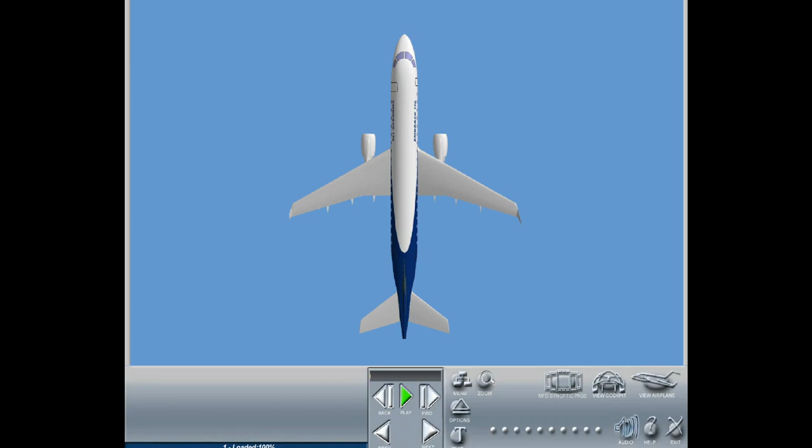The fire overheat protection system provides fire or smoke indication in the cockpit and cabin, and enables the crew to extinguish the fire.

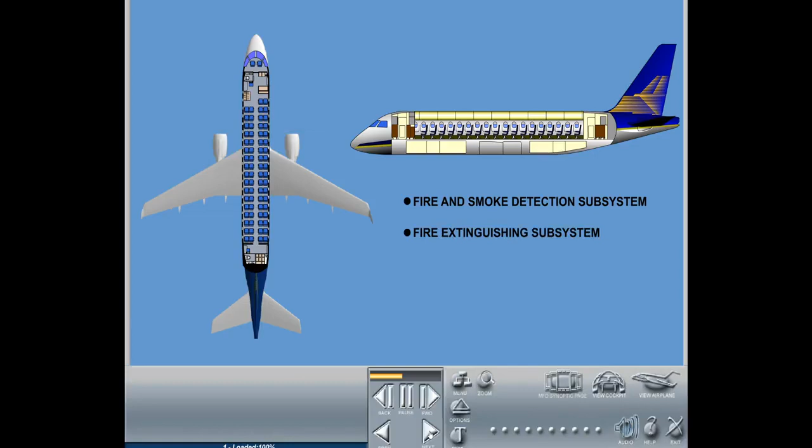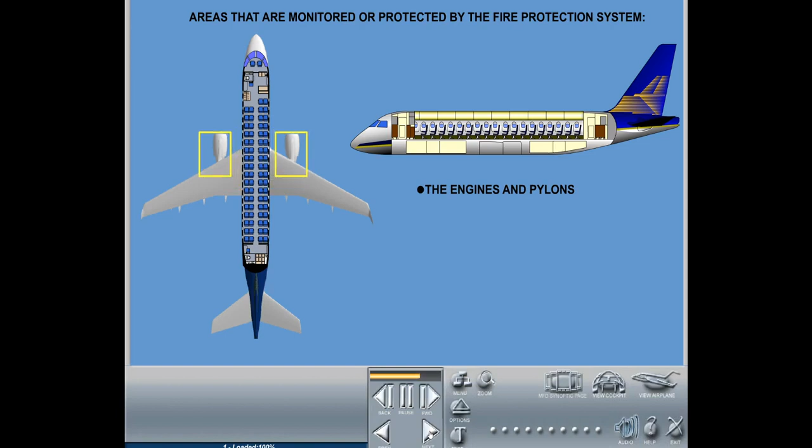The system is made up of the fire and smoke detection subsystem and the fire extinguishing subsystem. Areas of the Embraer monitored or protected by the fire protection system include the engines and pylons, the APU, the 2 cargo compartments, the lavatories and lavatory waste bins. In addition, portable fire extinguishers are located in the cockpit and cabin.

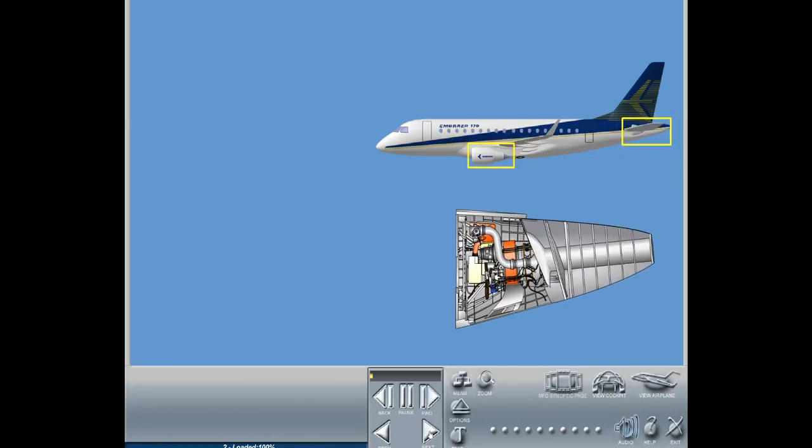The engines and APU are monitored by a fire and overheat detection system. If a fire occurs in either the engine or APU compartment, it can be extinguished by the respective fire extinguishing system.

The cargo compartments are monitored by a smoke detection system. They are equipped with a single fire extinguishing system for both compartments, which is built around 2 fire extinguishing bottles.

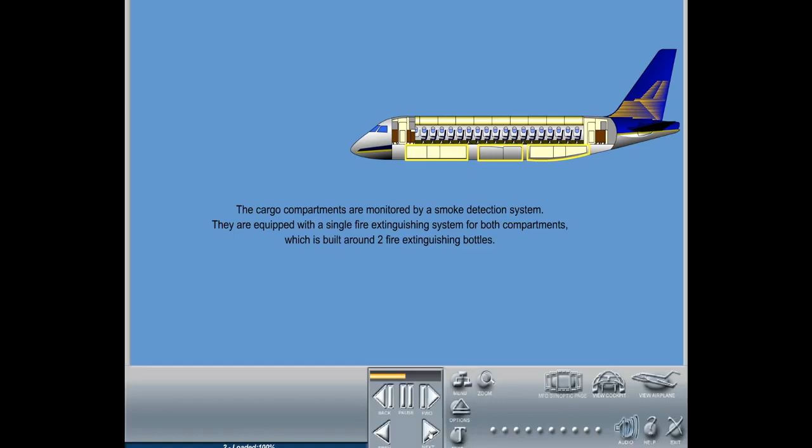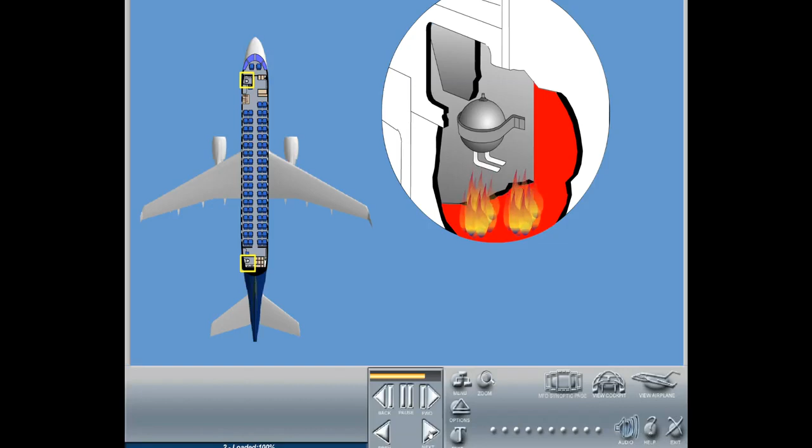The lavatories are equipped with a smoke detection system to alert the crew. In case of a fire in the lavatory waste bins, a fire extinguisher will automatically be discharged into the waste bin. To fight a fire on board, the crew can make use of the portable fire extinguishers installed in the cabin and cockpit areas.

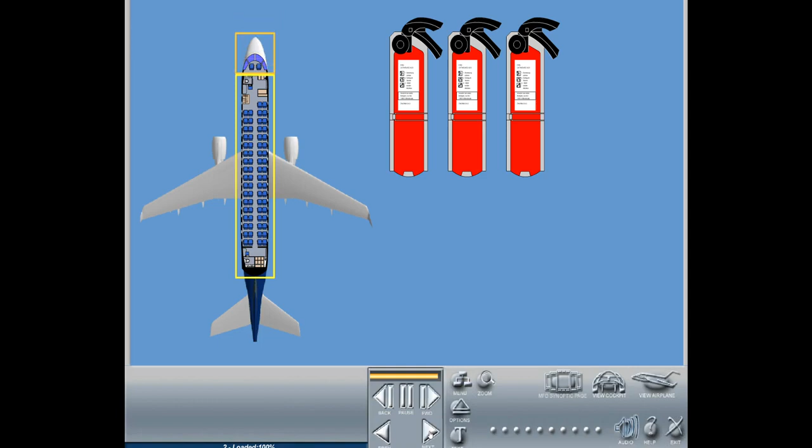The following equipment is installed on the overhead panel in the cockpit for indication and extinguishing of a fire. The left and right engine fire handles indicate a fire when a red light in the handle illuminates.

Pulling the handle will shut down the respective engine. The handles are also used to extinguish the fire by rotating them left or right.

The APU can be shut down by the crew in the event of a fire using the emergency stop button on the APU control panel.

The fire extinguisher control panel, located between the fire handles, allows the crew to extinguish a fire in the cargo compartments and in the APU. A test switch allows testing of the entire fire detection system. If a fire is detected, the respective warning messages will be displayed on the EICAS and aural warnings will sound.

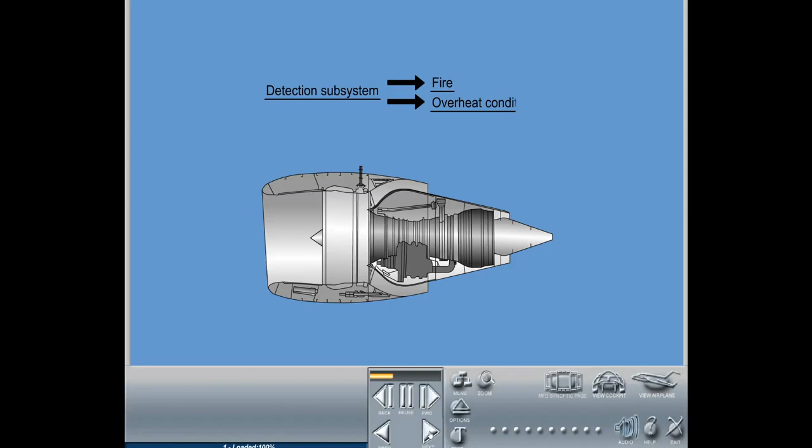The detection subsystem provides means for detection of fire or overheat conditions in the engine-designated fire zone by the use of fire detectors. These fire detectors are connected to the MAUs to generate the related indications in the cockpit.

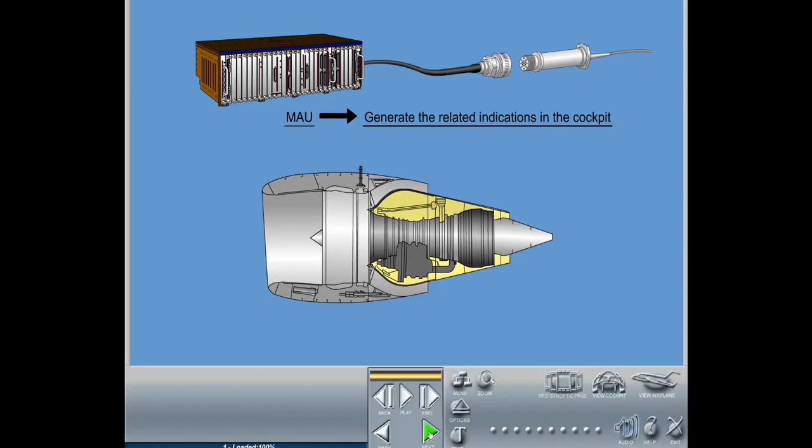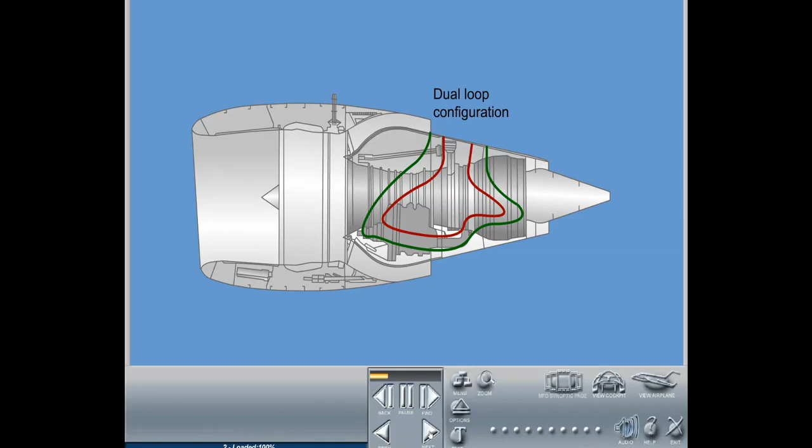The fire detectors are installed in dual-loop configuration, which means that each detector of loop A will have a correspondent detector of loop B protecting the same area. This configuration allows the aircraft to be dispatched with one loop inoperative.

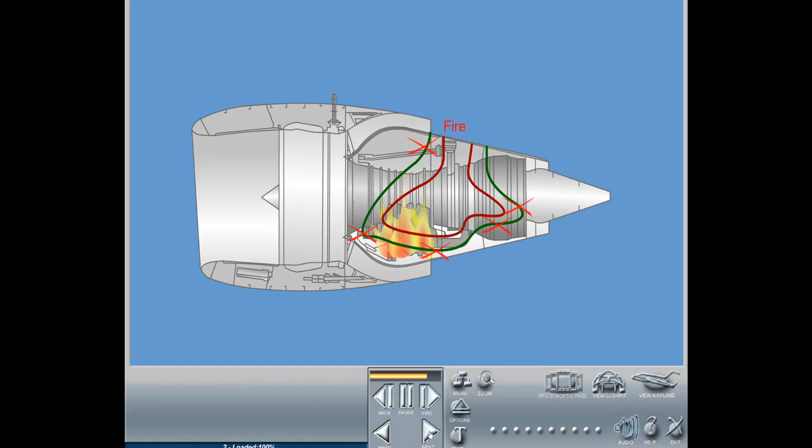During normal operation, both loops must detect a fire to provide a fire alarm in the cockpit. However, with one loop inoperative, the alarm will also be enabled when the remaining operative loop detects fire. If both loops are failed, an EICAS message is displayed.

In case of fire, the following indications are provided to the crew in the cockpit: the flashing master warning light, an aural warning in the cockpit, an Engine 1 fire or Engine 2 fire warning message on the EICAS, a fire inscription on the ITT icon, and a red light in the fire handle assigned to the engine where a fire was detected. The aural warning can be silenced by pushing the master warning button.

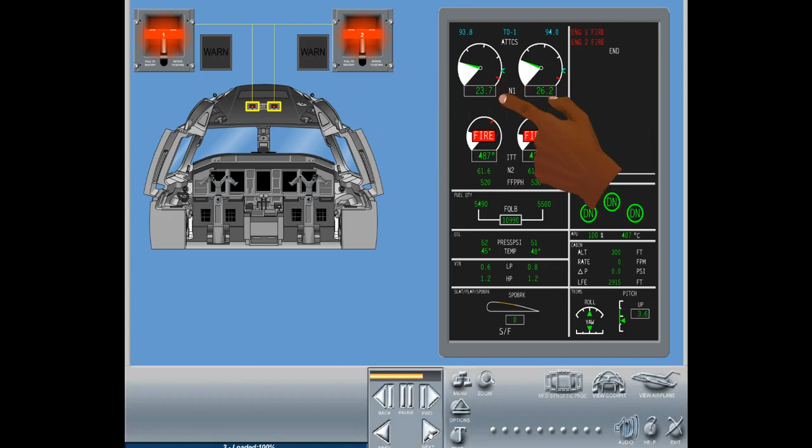The master warning light will then go off. However, the engine fire warning message and the red light in the fire handle will remain on until the fire is extinguished.

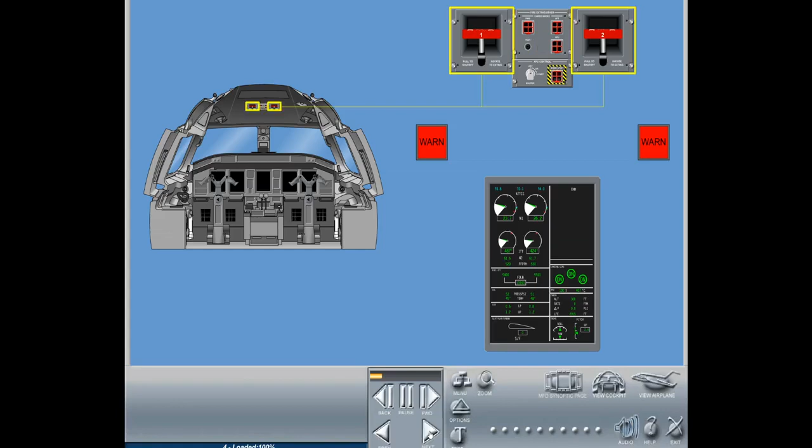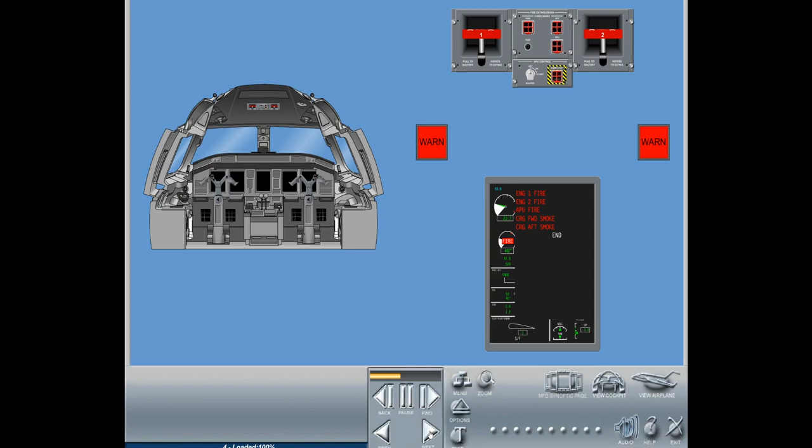The fire extinguisher panel in the cockpit allows the crew to manually test the fire detection system, fire illumination in the fire handles, warning messages, master warning push button, and the aural alarm. Pushing this test also tests the APU fire and the cargo smoke detection systems.

Performing the test with APU running should not take more than 10 seconds. Otherwise, the APU will shut down.

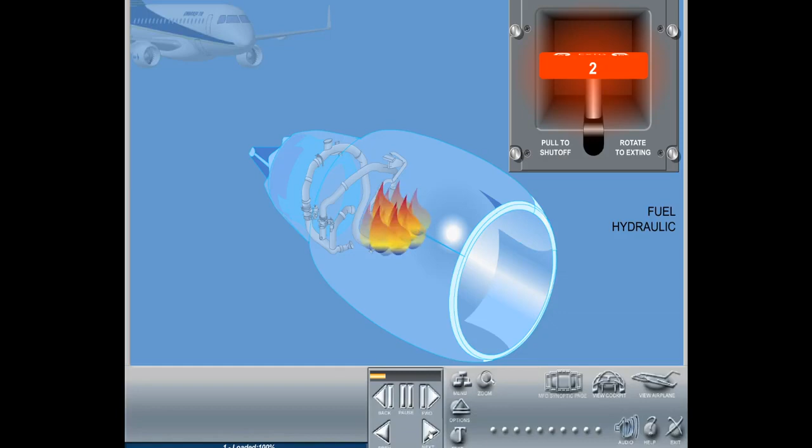The engine fire extinguishing system provides means to prevent fuel and hydraulic from flowing into the engine-designated fire zone, as well as a means for extinguishing fire in the engine-designated fire zone.

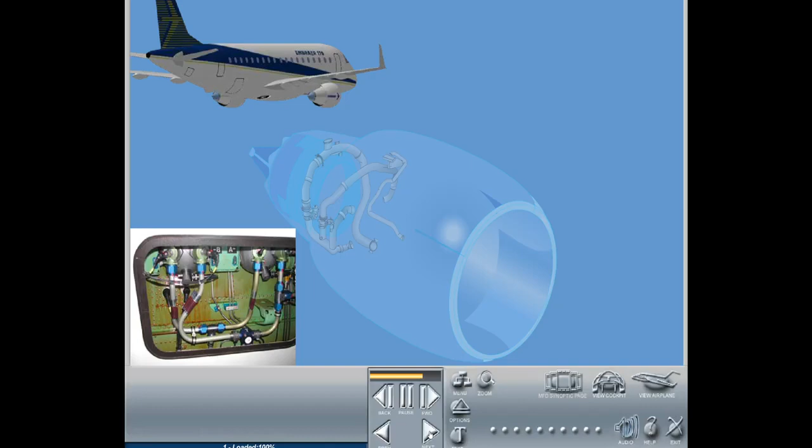2 fire extinguisher bottles, A and B, are installed in the right-hand rear wing-to-fuselage fairing. This permits a dual shot function for one engine through the discharge tubing and nozzles. Firing of the bottles can only be controlled by cockpit command through the fire handles.

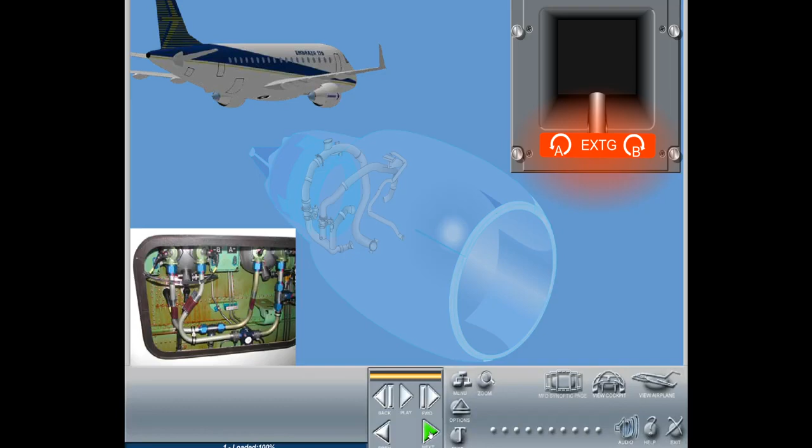The fire extinguishing agent is driven from the bottle to the engine fire zone by aluminum, stainless steel distribution pipes. The aluminum pipe is connected from the fire extinguisher bottle to the forward pylon.

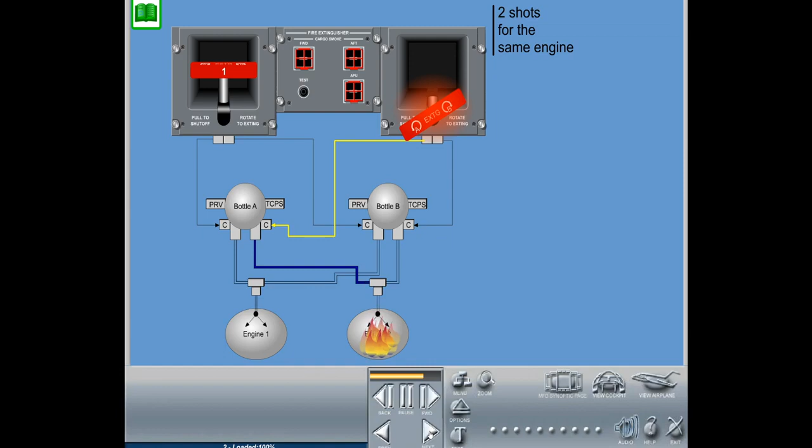Both fire extinguishing bottles are cross-connected, providing 2 shots for the same engine. Each shot, controlled by command from the cockpit, will discharge the fire extinguisher agent inside the requested engine 1 or 2 fire zone.

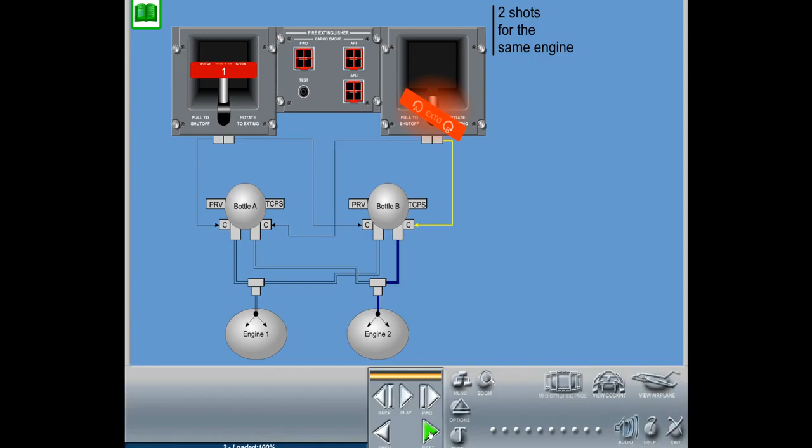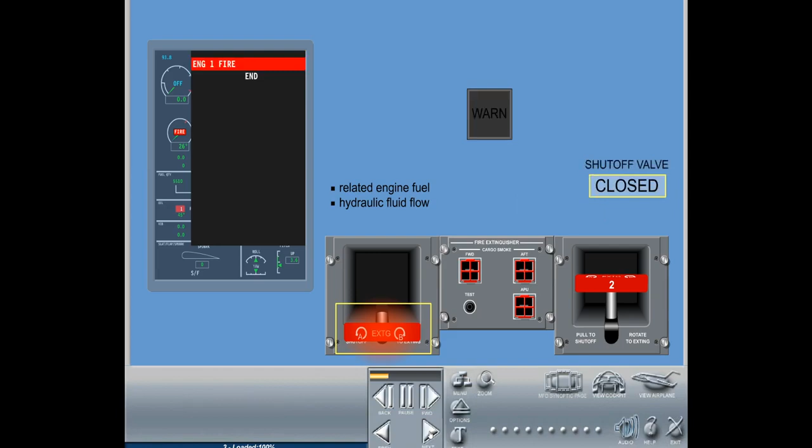If a fire warning illuminates for engine 1, the related fire handle will illuminate in red. By pulling down this fire handle, the related engine fuel and hydraulic fluid flow will be stopped by closing the shutoff valves. The bleed air of the related engine will also be closed.

By rotating the fire handle counterclockwise to extinguisher A, the explosive cartridge for engine 1 on bottle A will detonate, and the fire extinguishing agent will be discharged into engine 1 core compartment.

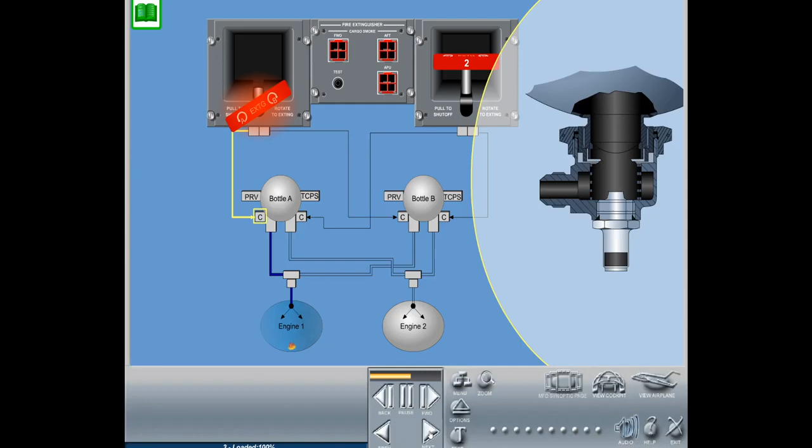After the fire extinguishing bottle is discharged, an engine FireX bottle A discharge message will appear on the EICAS. If the engine 1 fire warning stays on, bottle B can also be used for this engine.

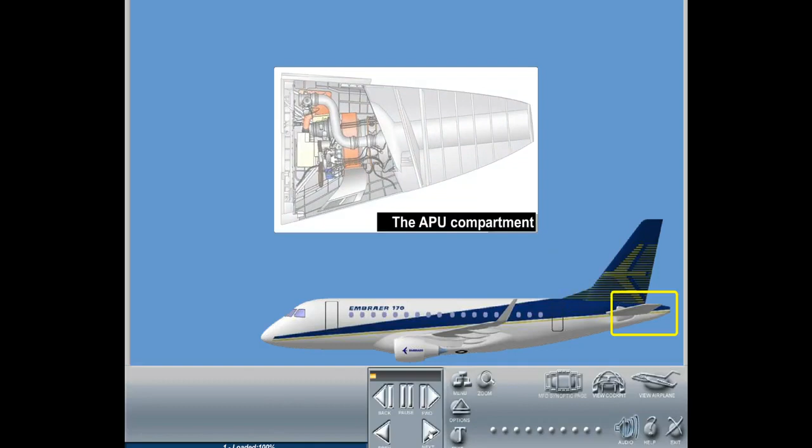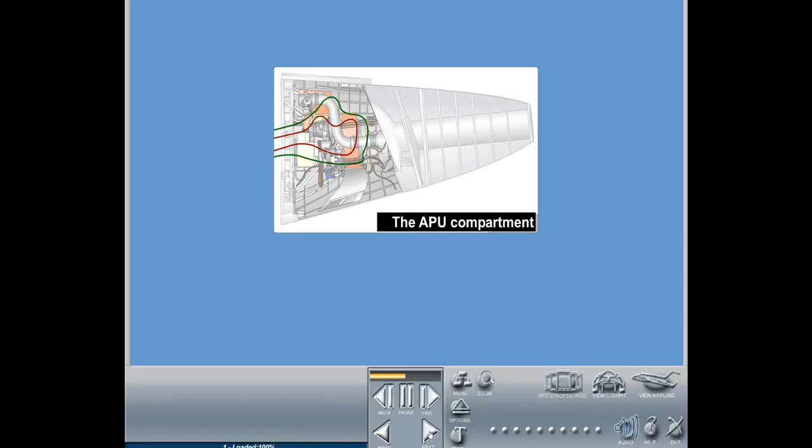The APU fire detection subsystem uses 2 pneumatic fire detectors to detect a fire or overheat condition in the APU compartment. The fire detectors are similar to the engine fire detector in design and function. The fire detectors are connected to MAU 1 and 3, which supply indications to the EICAS and CMC.

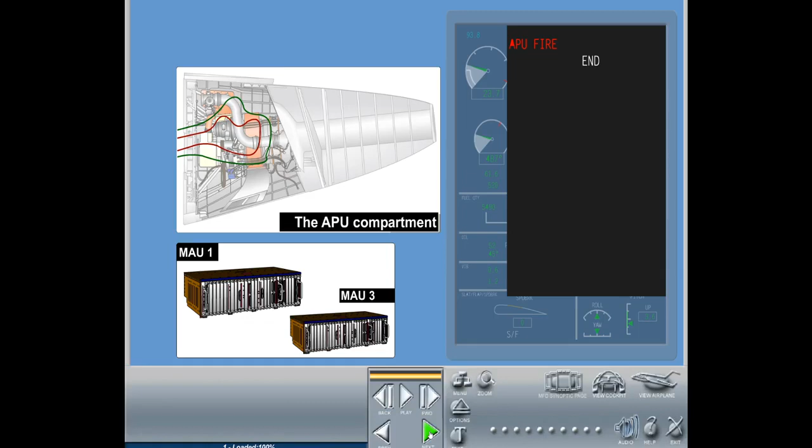The APU fire detection system receives electrical power from the essential DC buses via the MAUs. There are 2 loops with 1 detector each, protecting the same area.

If both loops detect a fire condition during normal operation, the MAUs will generate an APU fire warning message in the cockpit, and the red striped bar of the APU emergency stop button will be illuminated.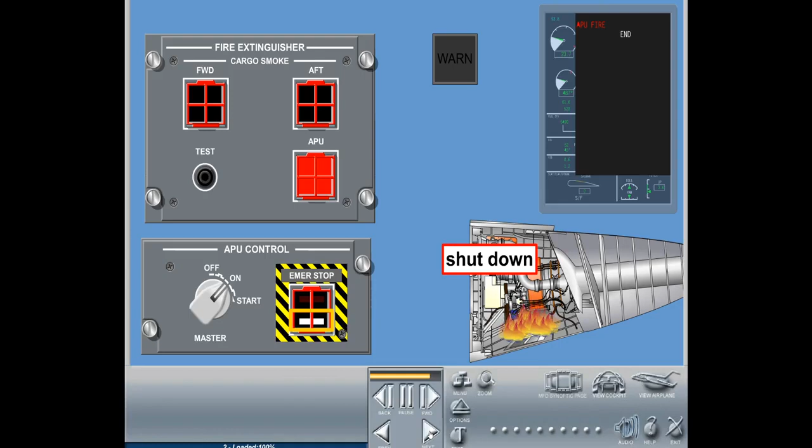When pressed, this button will shut down the APU immediately. The red illumination will turn off, illuminating the white striped bar of this button, and the APU fire extinguisher button will illuminate.

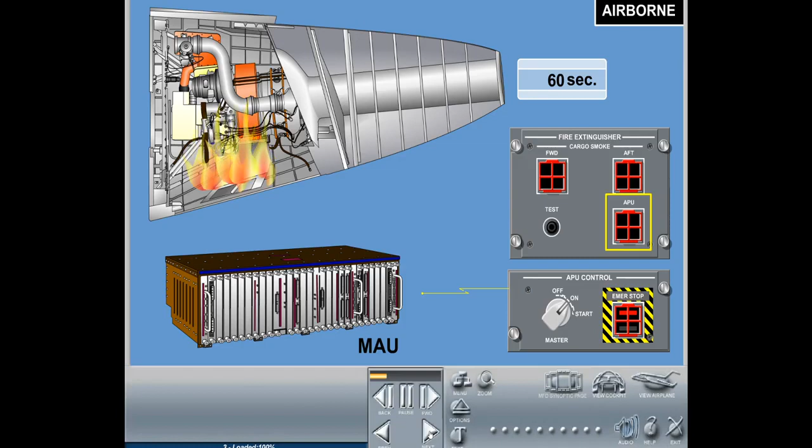If, in the event of fire, 1 minute has passed without the MAU receiving a positive indication that the APU emergency stop button was pressed, the APU fire extinguish button will illuminate.

If there is an APU fire on ground, the APU will shut down automatically after 10 seconds, if there is no commanded shutdown through the APU emergency stop switch.

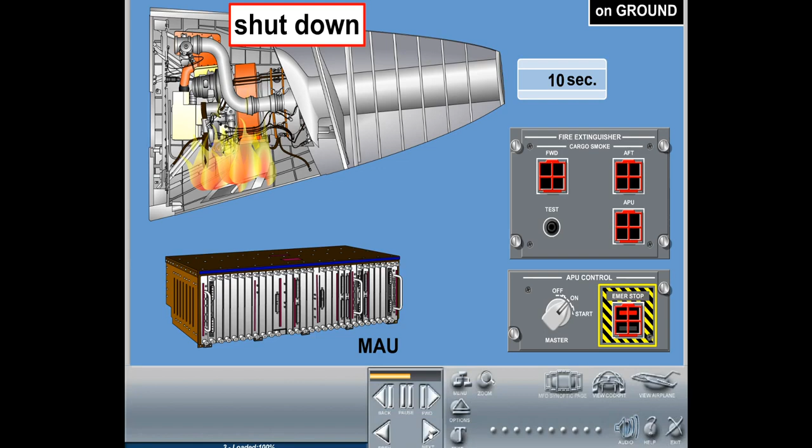The fire detectors will be continuously monitored. When both loops are failed, an APU Fire Detection Fail message will be displayed on the EICAS.

In case of a fire detector loop failure, the fire alarm will be provided in the cockpit when the operative loop detects fire.

A test button on the fire control panel is used to manually test the APU fire detection system. When pressed, the following will occur:

Illumination of APU emergency stop and APU fire extinguishing buttons, the master warning push buttons, APU fire CAS message, and aural fire warning.

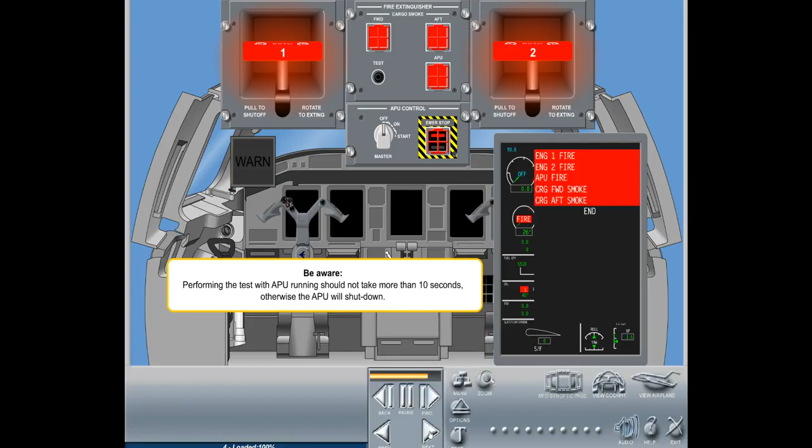This test button will also test the main engine fire detection system and the cargo smoke detection system. Performing the test with APU running should not take more than 10 seconds. Otherwise, the APU will shut down.

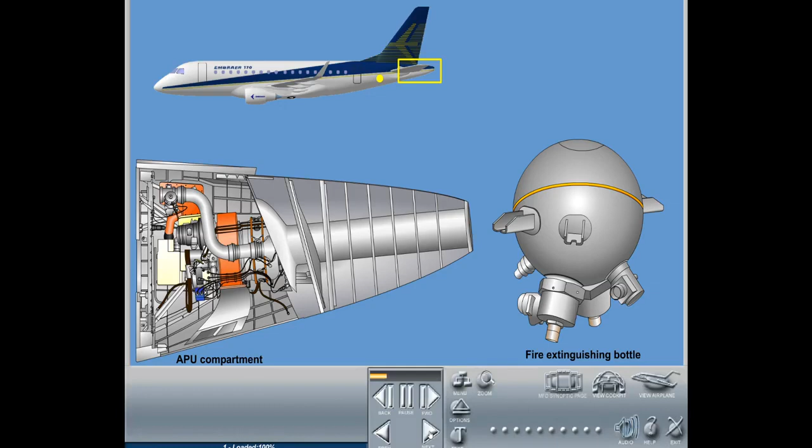The APU fire extinguishing subsystem is used to discharge one fire extinguishing bottle, which is installed in the rear fuselage, into the APU fire compartment. The fire extinguishing bottle discharge is controlled by command from the cockpit.

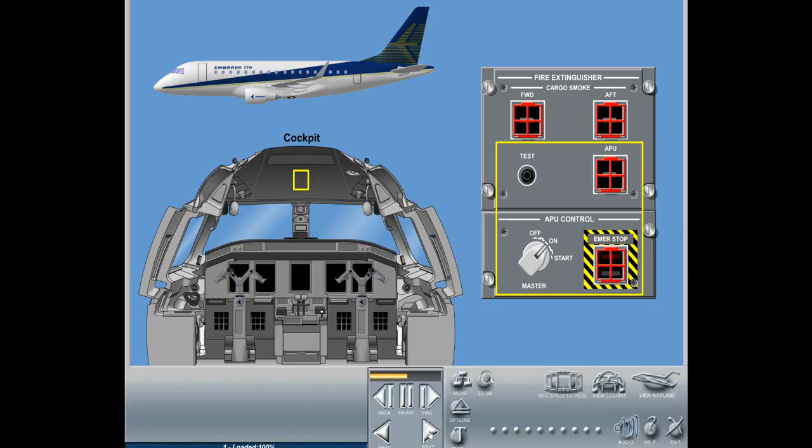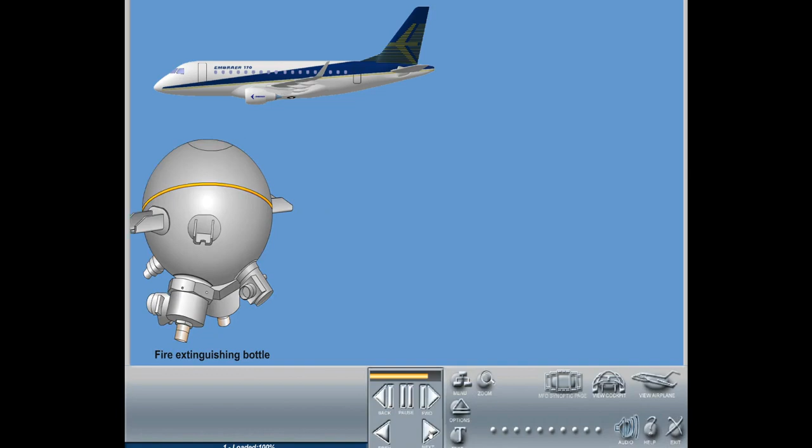The fire extinguishing bottle pressure, power supply, cartridge integrity, and related harnesses are continuously monitored. In case of a failure, a message will illuminate on the EICAS and on the CMC.

When the guarded APU emergency stop button is pressed, the APU fuel shutoff valve will be commanded to close and the APU will shut down. Shutoff valve position is displayed on the EICAS.

After the APU emergency stop button has been released, the APU shutoff valve can be reopened by rotating the APU master switch to the on position.

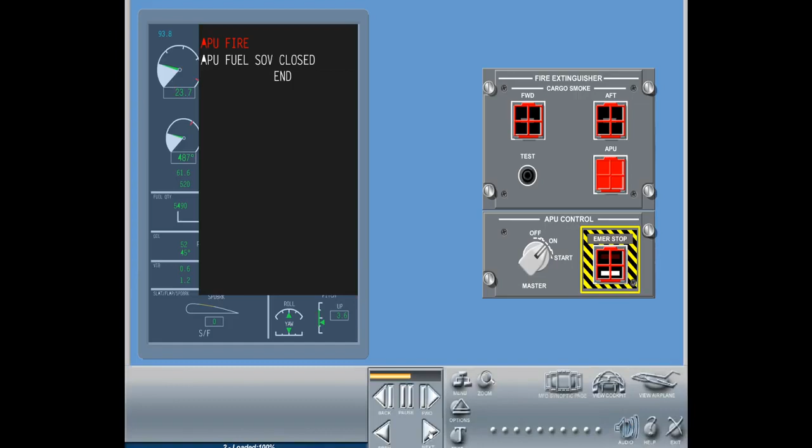In the event of an APU fire, by pressing the APU emergency stop button, the APU will stop and the fuel shutoff valve will close. To discharge the fire extinguishing agent into the APU fire zone, the APU fire extinguishing button should be pressed.

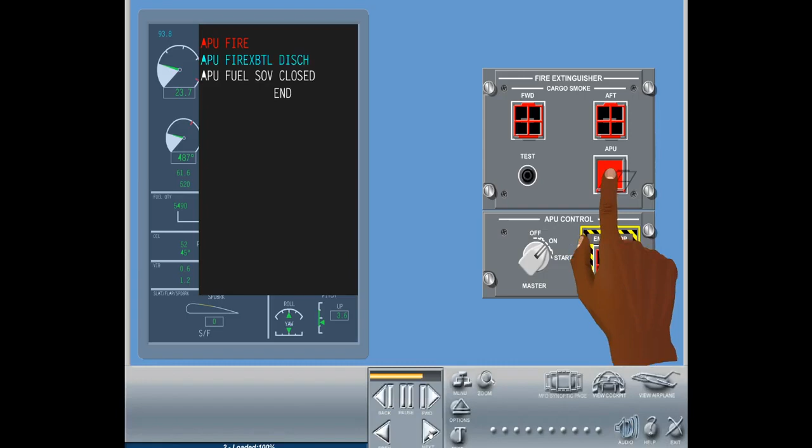By pressing the APU fire extinguishing button, the APU will shut down and the APU fuel shutoff valve will close when the APU emergency stop button has not been pressed before.

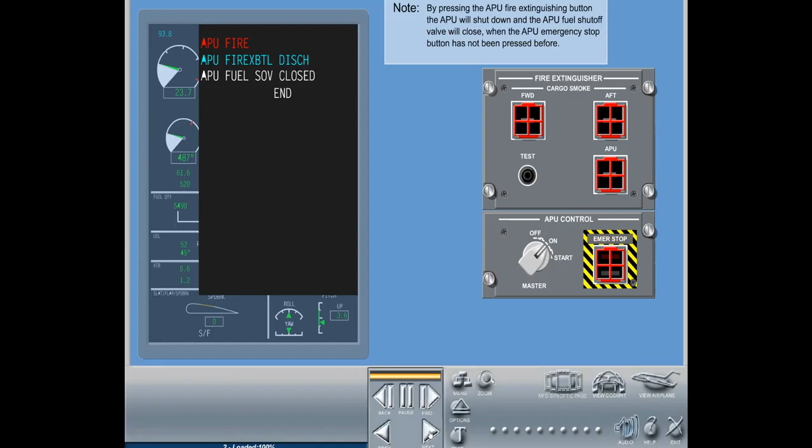The cargo compartment smoke detection subsystem is designed to detect smoke in the cargo compartment and turn off the ventilation in the forward cargo compartment. The system includes a group of ceiling-mounted photoelectric fan-type smoke detectors installed in recessed trays within the ceiling of the cargo compartments. Signals from the smoke detectors are routed to the flight deck via the MAUs, which process the necessary system information for the operating crew.

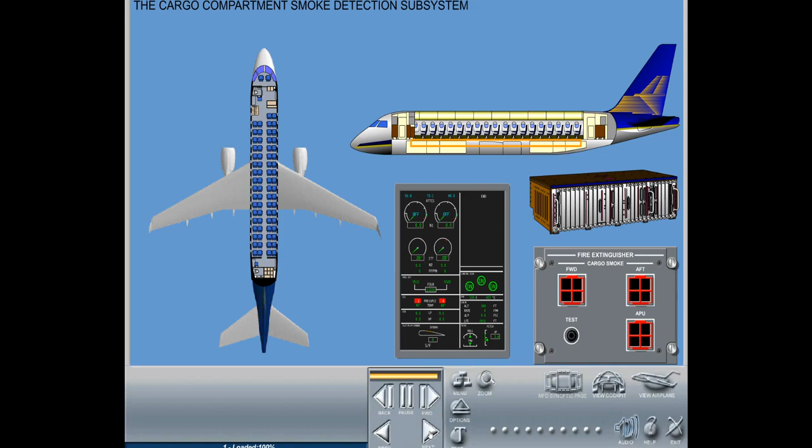In the rear cargo compartment, smoke must be detected by two independent smoke detector channels for an alarm to be reported to the flight deck. Indications include an audible alarm, master warning lights flashing, the aft cargo compartment fire extinguishing button illuminating, and cargo aft smoke and cargo Firex high armed messages on the EICAS.

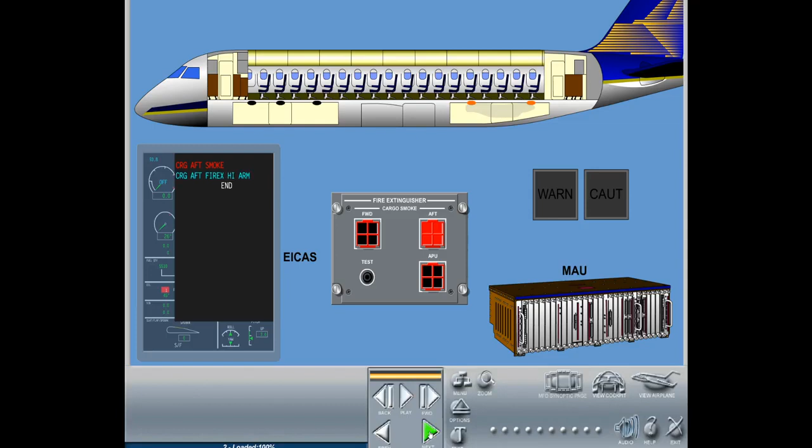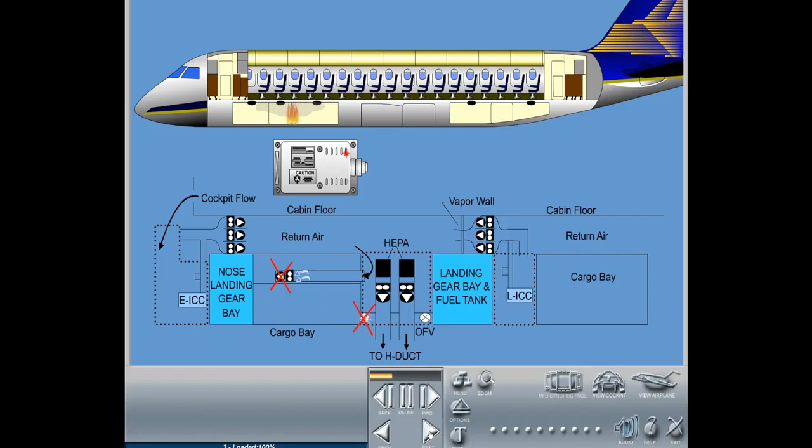The forward cargo compartment smoke detection system has a different configuration. As optional, it is equipped with an air circulation fan and cargo compartment shutoff valve. If only a single detector goes into alarm, fan operation is terminated and the cargo compartment shutoff valve is closed. The shutdown sequence starts in the forward cargo compartment without any cockpit annunciation activated.

The air circulation fan is shut down for 60 seconds, and the remaining smoke detectors are monitored for 45 seconds in alarm condition. Successful completion of the built-in test and absence of an alarm condition will result in the alarm being treated as a fault. Only if another detector goes into alarm within the 45 seconds is a cargo forward smoke annunciated in the cockpit.

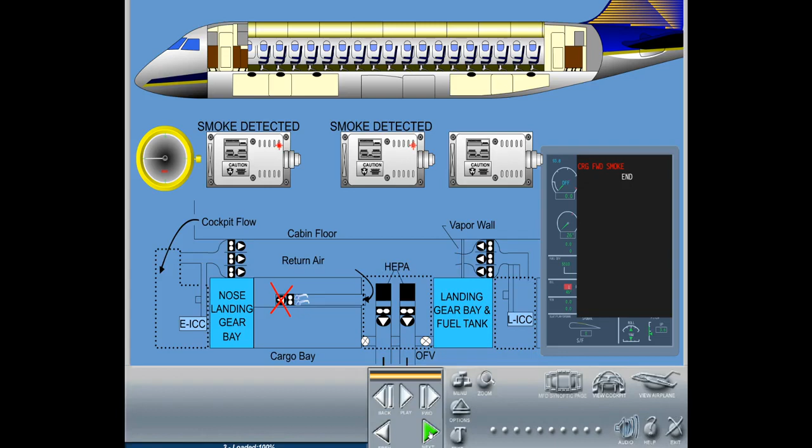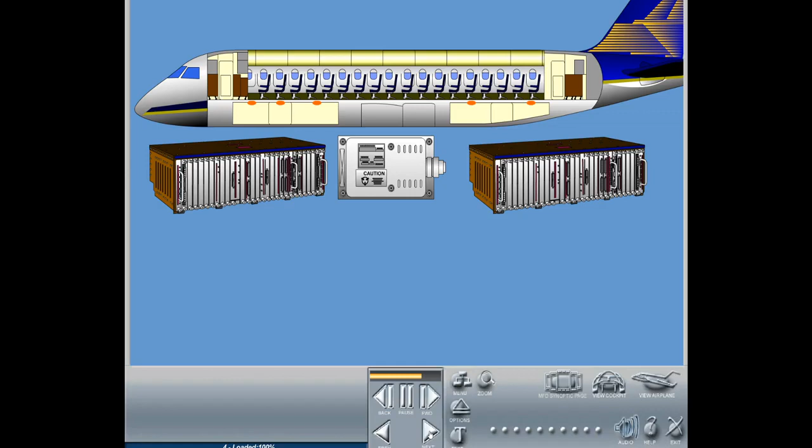The smoke detectors are continuously monitored by built-in test. If only one smoke detector is available in one compartment, the MAU will automatically report a cargo forward aft smoke when one smoke detector reports a fire alarm. When the aircraft is on ground and a faulty smoke detector is realized, a cargo fire protection fault will be indicated on the EICAS. In the event that all smoke detectors in one cargo compartment have failed, a cargo forward aft fire system fail message will illuminate on the EICAS.

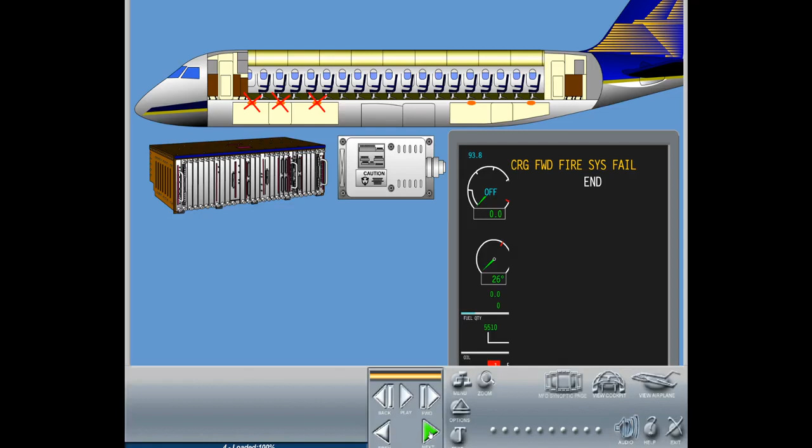The cargo compartment smoke detection system can be manually tested through a system test button located on the overhead panel. This test will verify that the smoke detectors and the flight deck interface components are functioning. Additionally, this test will verify that the fire extinguisher cartridges are not faulty.

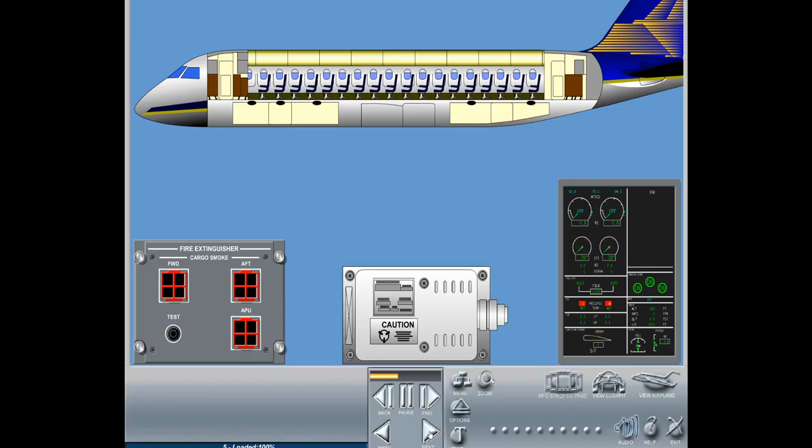When the switch is pressed, the master warning lights will flash, and the aural warning will sound. The cargo forward aft smoke message will illuminate. The cargo extinguisher lights will be activated. The forward cargo compartment fan will stop, and the vent valve will close. In case the ventilation fan will not stop, cargo forward vent fail caution will illuminate.

The cargo compartment fire suppression subsystem supplies fire extinguishing agent to the cargo compartment to extinguish a fire. Fire extinguishing agent will also be supplied for up to 60 minutes to prevent a fire from reigniting. Two fire extinguisher bottles are installed in the center E-bay. One high-rate discharge bottle is filled with 5.91 kilograms, 13 pounds, Halon 1301, and one low-rate discharge bottle is filled with 9.98 kilograms, 22 pounds, Halon 1301.

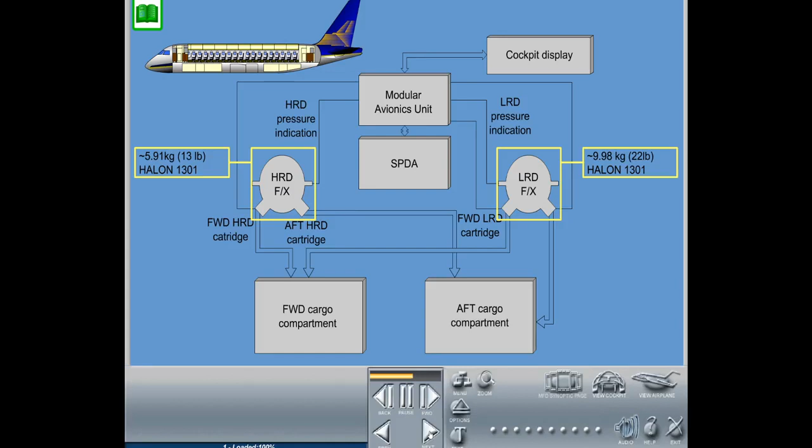They are equipped with dual outlets to discharge suppression agent into either of the cargo compartments. The high-rate gas flow is designed to extinguish the fire by filling the cargo compartment with the required concentration of Halon 1301, while the low-rate gas flow afterwards prevents reignition. Discharge is initiated by cockpit command.

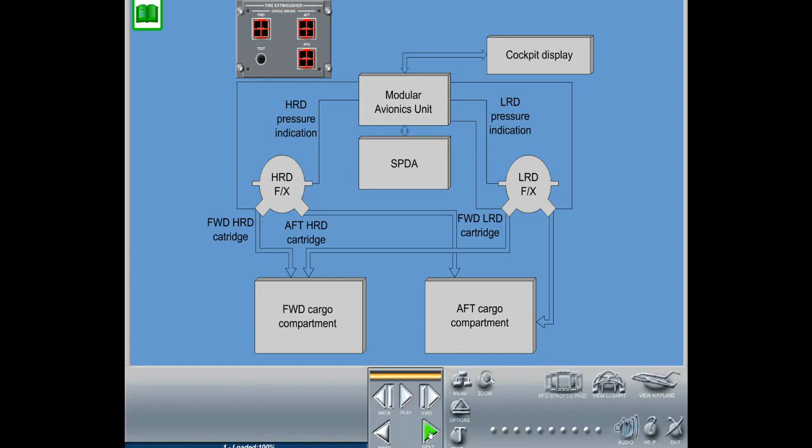If a cargo fire occurs, the cargo smoke warning will be displayed in the cockpit and the appropriate cargo compartment fire extinguisher button will illuminate. This automatically arms the high-rate bottle.

By pressing the illuminated extinguisher button, the high-rate bottle will discharge into the related cargo compartment and the low-rate bottle will be armed. After 1 minute, the low-rate bottle will automatically discharge and distribute its agent via the dryer metering unit into the cargo compartment.

The low-rate bottle can be discharged manually before the 1 minute has expired by pressing the extinguisher button again. The light in the button will go off after the low-rate bottle has been discharged. Note that the cargo smoke indication will stay on as long as the fire situation exists.

The fire extinguishing system can be used even without a cargo smoke warning. The high-rate bottle is armed by pushing a cargo fire extinguisher button and is indicated by the red button light and EICAS message.

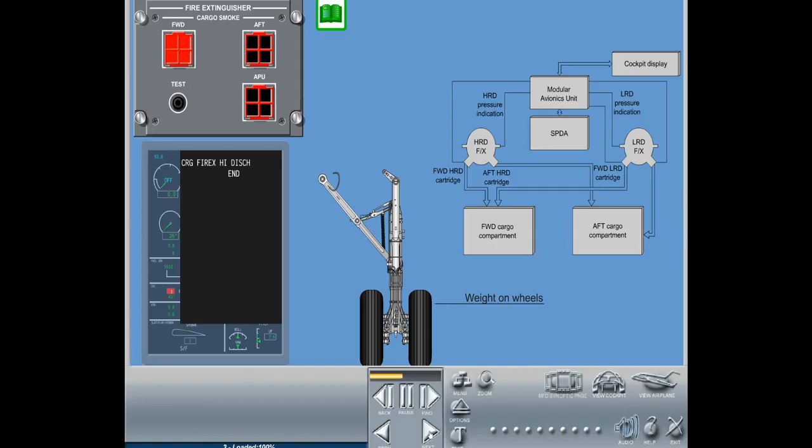If the button is pushed again within the next 2 minutes, the high-rate bottle will be discharged. Depending on whether or not the aircraft is weight on wheels, the sequence for the low-rate bottle is automatic in flight or manual on ground. In flight, the second bottle will fire automatically after 1 minute.

On ground, the button has to be pushed twice to arm and to fire the low-rate bottle. If the button is not pressed a second time within 2 minutes after arming, the system will reset. When the fire test button is pressed, the system will reset.

Now you can try the different options of discharging the Fire-X bottles into the cargo compartments. You can select fire in the forward or aft cargo compartment, the aircraft in flight or on ground, and reset the system for a new trial by selecting the appropriate switches. You can also press the related cockpit control buttons.

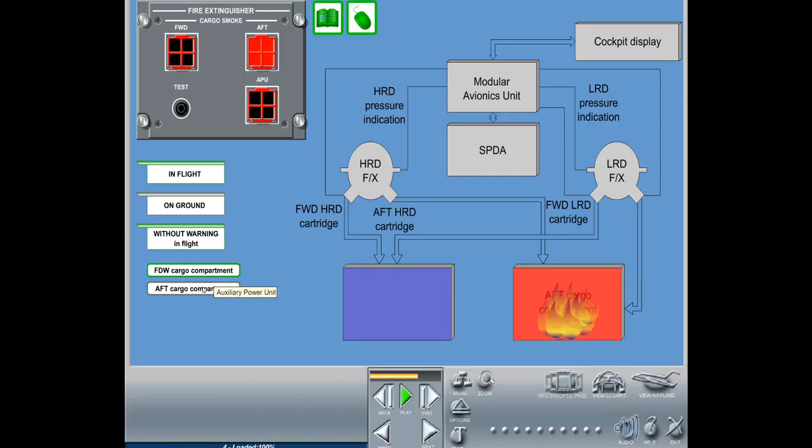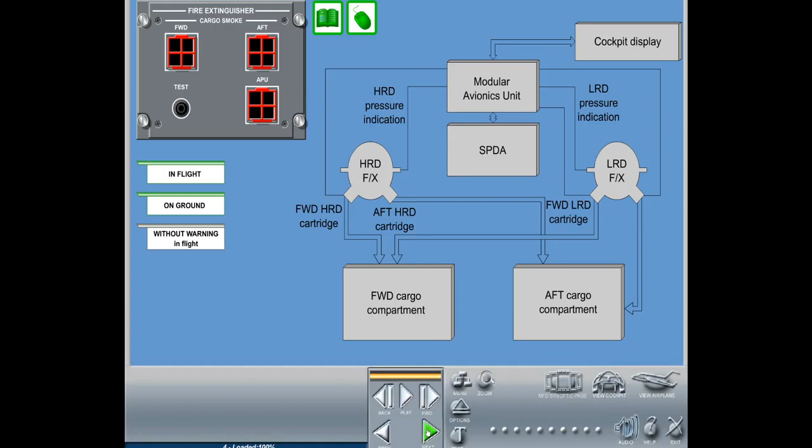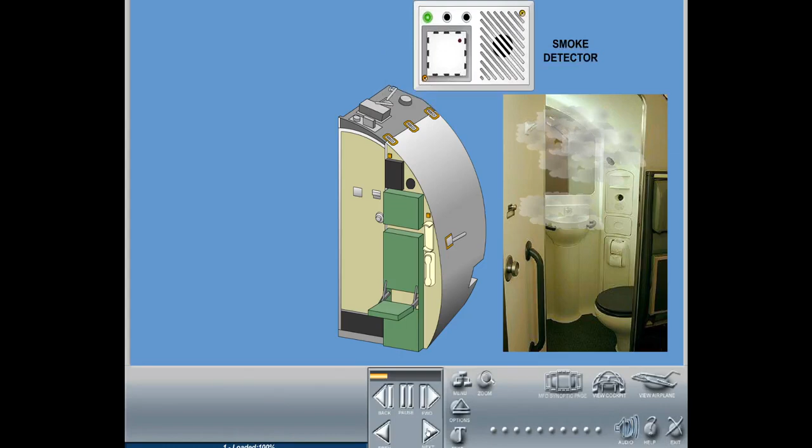The lavatory smoke detection system detects smoke in the lavatories and warns the crew. The system consists of smoke detectors mounted on the forward and aft lavatory ceiling panels and lavatory smoke test switches on the forward and aft flight attendant panel.

The lavatory smoke detection system is provided with the following indications: CAS messages, aural indication through a smoke detector built-in chime, visual indication through the red alarm indicator light and the forward and aft attendant light indicator panels.

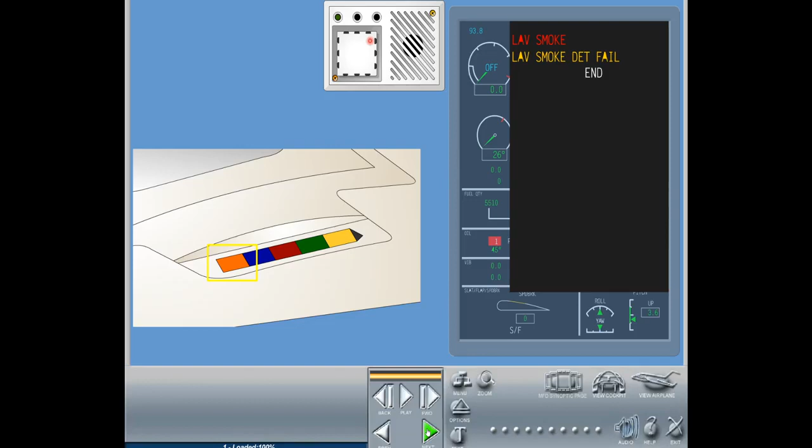When smoke is detected in any lavatory, the following sequence is initiated. An alarm will sound inside the lavatory where smoke has been detected. The chime is mounted into the lavatory smoke detector assembly and is audible from anywhere in the cabin.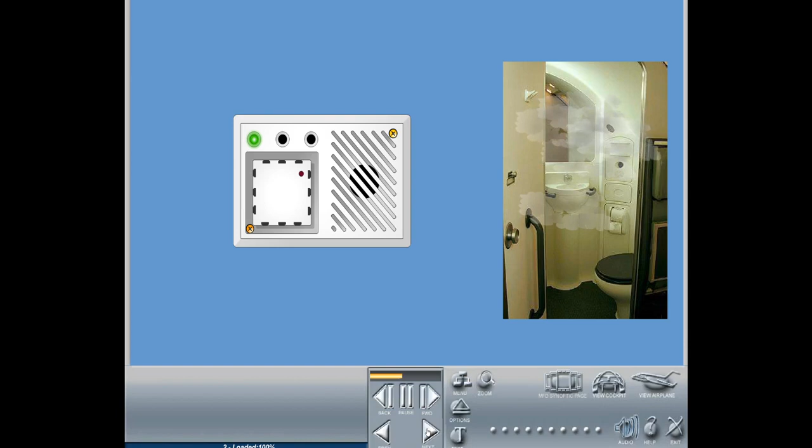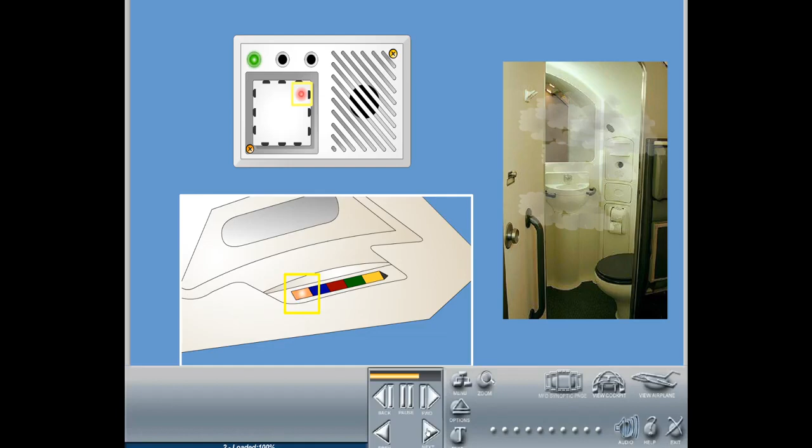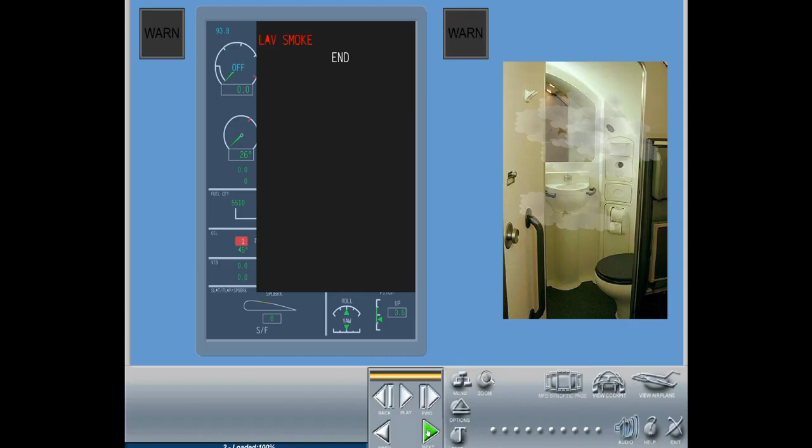System operation can be confirmed electrically by a self-test circuit, by pushing the built-in self-test switches on the forward flight attendant panel. When built-in test is initiated from the forward flight attendant panel, by pressing and holding the test switch for a particular lavatory, the smoke detectors, cabin crew, and flight crew indications are tested. After the test switch is released, the CAS message and the master warning indication are held for 7 seconds.

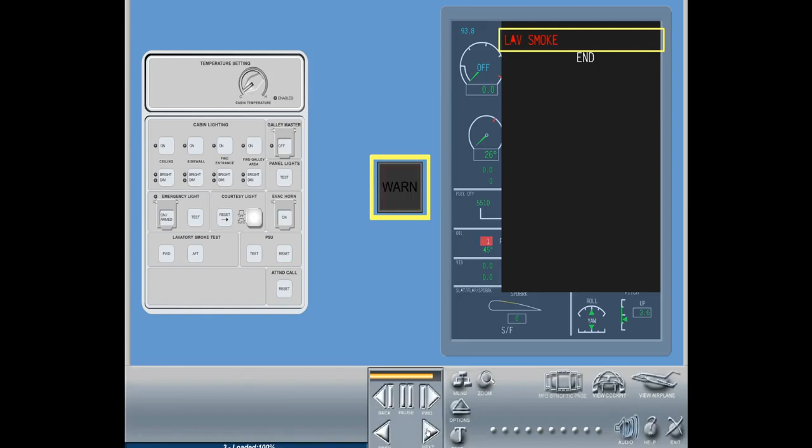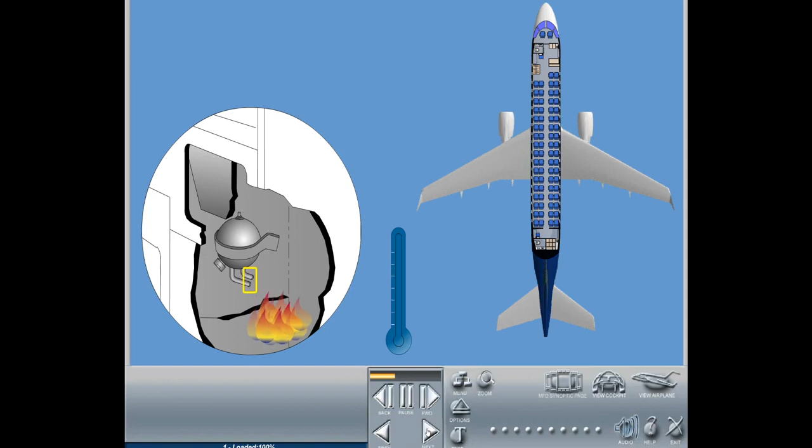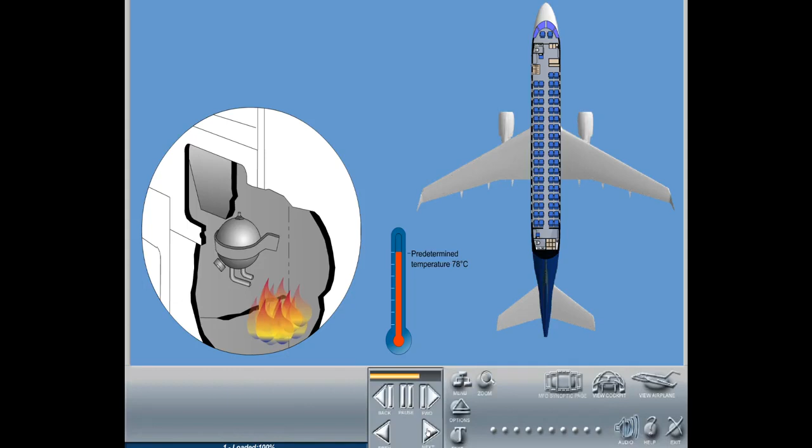If fire occurs inside the waste disposal, the auto-discharge fire extinguishing bottle will be automatically discharged. The tip at the end of each discharge tube will melt at a predetermined temperature, causing the bottle to fully discharge into the waste compartment and knock down the fire in the waste disposal. Discharge indication can be seen on this pressure gauge.

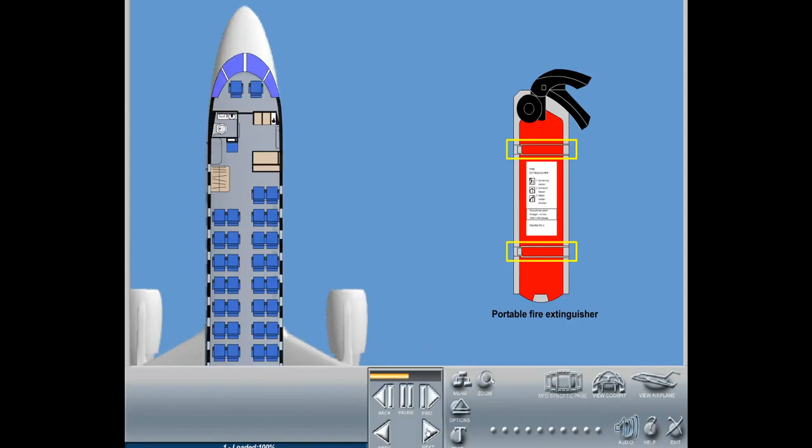To fight a fire on board, the crew can make use of the portable fire extinguishers installed in the cabin and cockpit areas. Each fire extinguisher contains a blended halon 1211-1301 with low toxicity characteristics. One fire extinguisher is located on the left-hand side of the cockpit bulkhead, behind the pilot's seat, and there are fire extinguishers located in each galley area. The standard configuration will be equipped with 2.5 pounds halon.

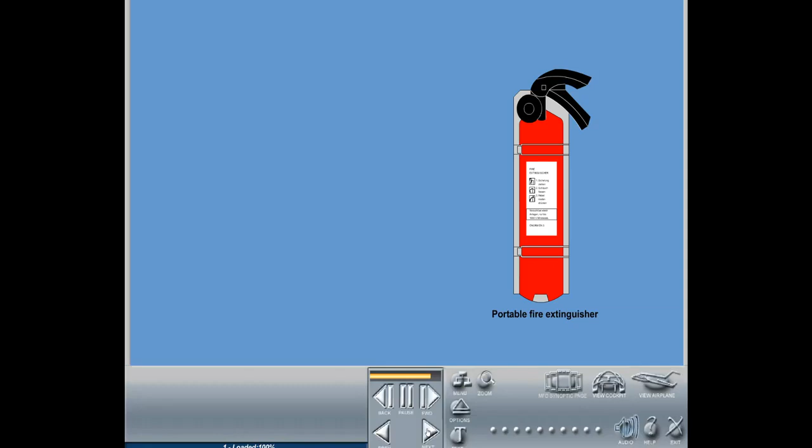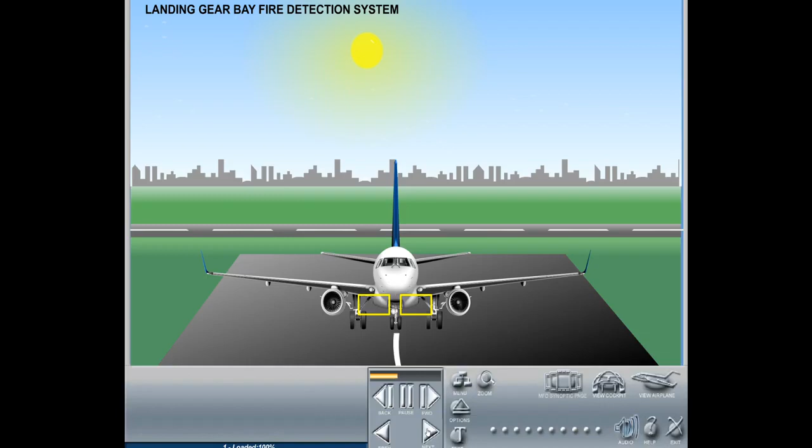Landing gear bay fire detection system. The optional landing gear bay fire detection system provides main landing gear overheat or fire annunciation to the flight crew. Each main landing gear bay has an independent dual-loop pneumatic sensor installed.

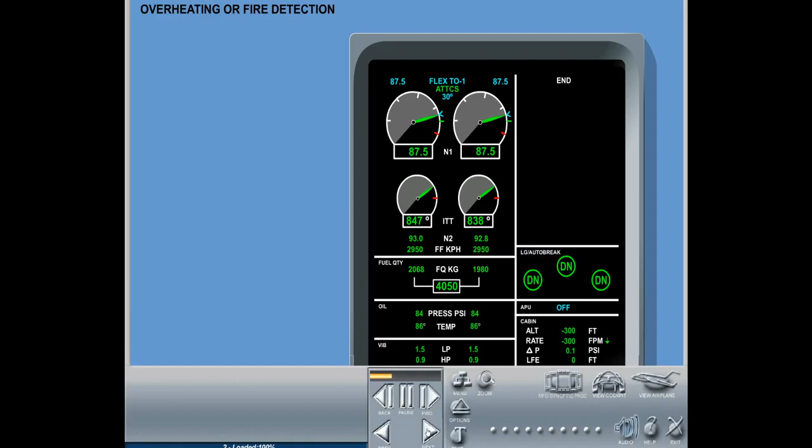If overheating or fire is detected by both loops of the same landing gear bay, the system provides the following indications. The aural warning sounds. The master warning lights flash. The landing gear bay fire warning displays on the EICAS.

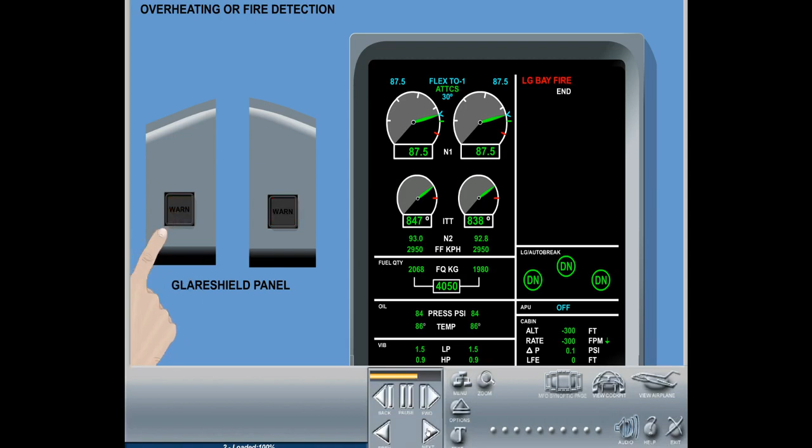For both cases, if the landing gear is cooled down to preset values, the system provides normal indications to the flight crew.